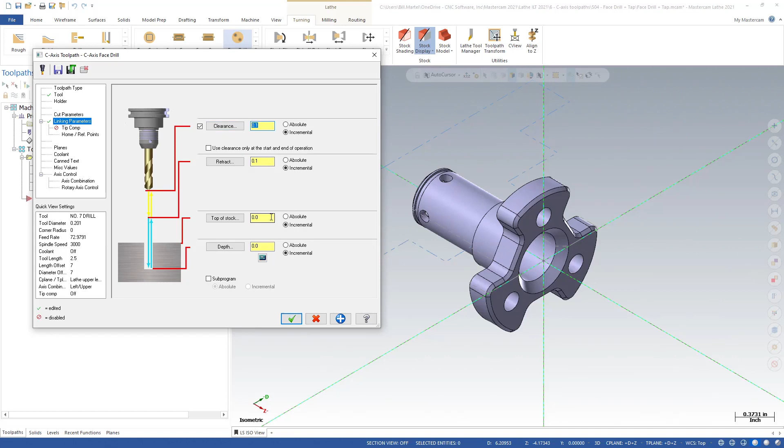For our linking parameters, I'll do a clearance value of 0.1, retract to 0.1. For a depth, I'll go out and I'll pick the bottom of the hole. Brings back -250. We do want a tip comp to get it through the hole, and we'll break through an extra 20 thousandths. So we'll comp for our tip and break through, and that should do it.

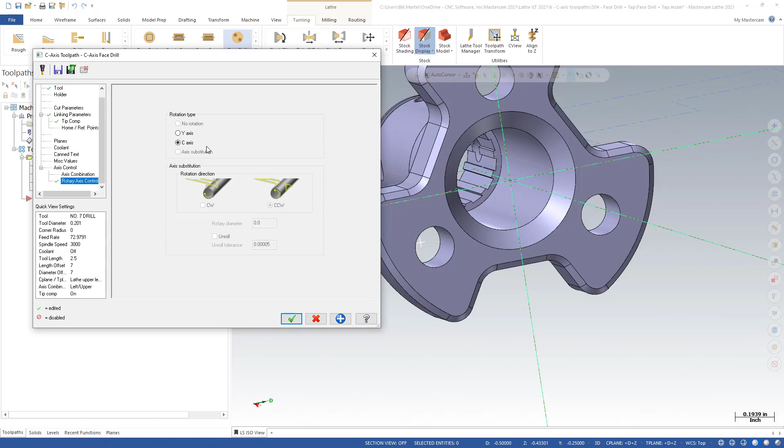We do have a choice on our rotary axis control whether we want to use a Y or a C. Now, of course, your machine has to have a Y in order to use it, and it is a different approach to how the machine is processed. I'm going to go ahead and use the C axis here. So that looks pretty good. We'll do a quick back plot. That looks good.

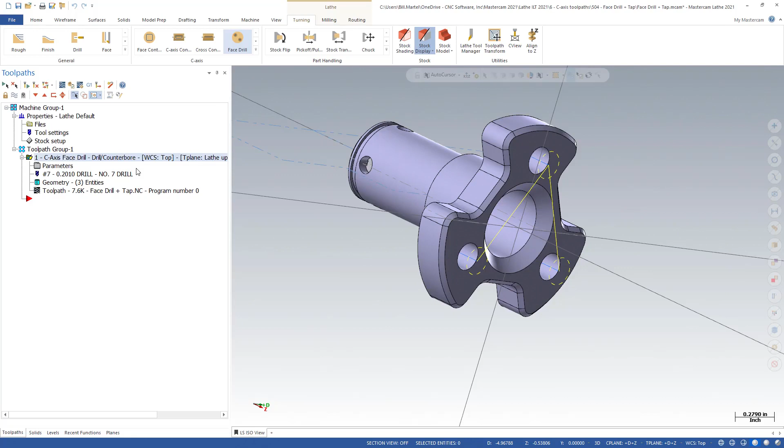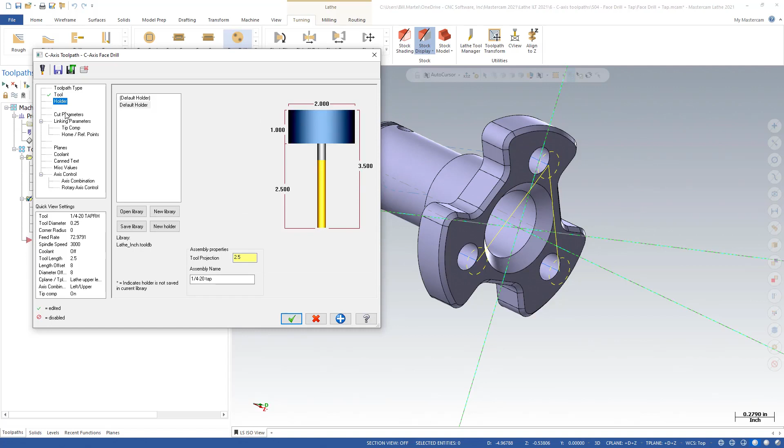To tap it, I'll copy the face drill op using the Control-C, Control-V option. For parameters, we'll go up and change our tool. So we want the 1/4 20 tap. Of course, we'll change our comment here. We'll call it a 1/4 20 tap. Now I'm going to leave our speeds and feeds here for now and see what happens. Default holder is okay. For our cut parameters, I do want to change our cycle. We'll change that to tap.

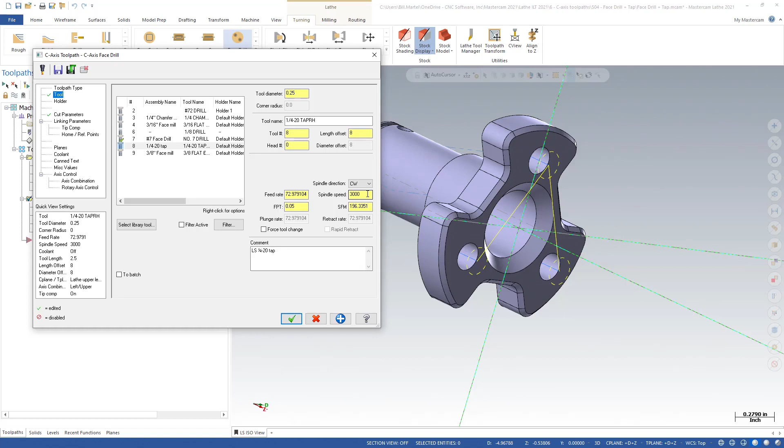And we'll come back and take a look at our speeds and feeds now. So you can see our feed per tooth is now 0.05, which is correct for a 1/4 20 tap. Our spindle speed's a little high for tapping, depending upon material. We'll make that 750. You'll also notice when I enter this, our feed rate per minute will change. So again, we want to leave it on the C axis, just like we drilled.

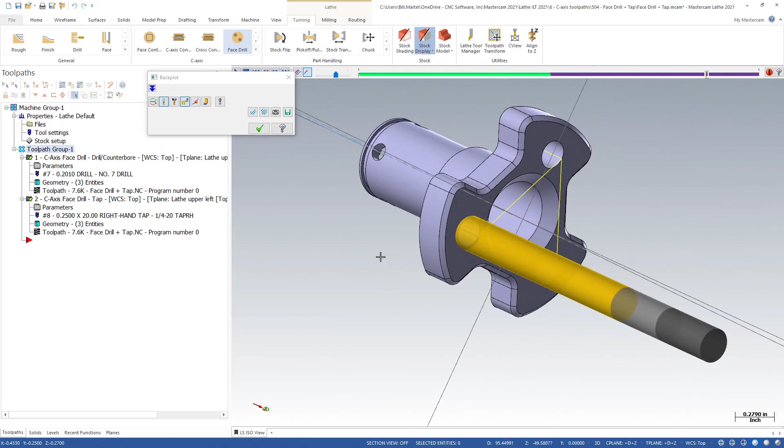So this should give us a good toolpath. We'll back plot them both. Looks good. Tap, tap, tap. We're getting through. So it looks good. There's our drill and tap on a face.

Let's take a look at the plane that this created. So if I go to planes, you'll see that we're using the lathe upper left top. And if I look at my planes, you can see that Mastercam created the lathe upper left top for me. So there's one of the benefits of using the C-axis toolpath.